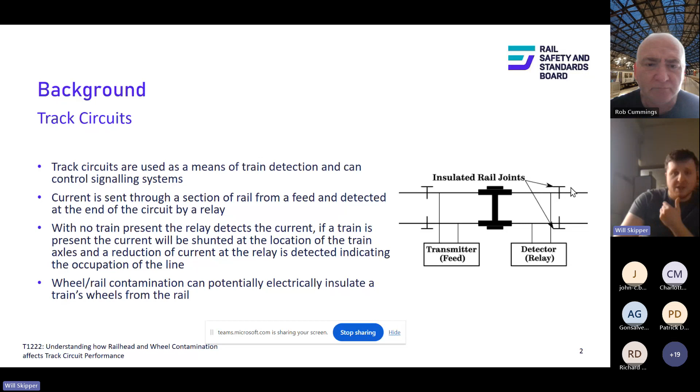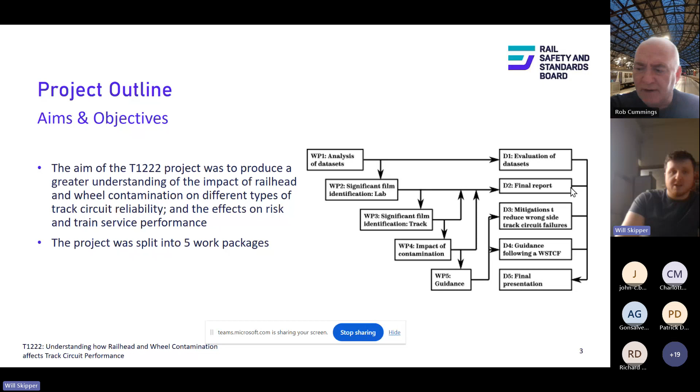A very brief look at what we actually did: first, we analysed some data sets, the national wrong side track circuit failure data for 10 years, from 2011 to 2021, looking at all those incidents. Then we did some lab testing, then track testing as well, and we produced some documents off the back of this, which I'll briefly introduce. Again, everything is online through the RSSB from the T1222 project.

So to begin with, the analysis of data sets. As I said, it's 10 years of national data that we could get our hands on, which equated to about 6,000 incidents, and these are all showing clear when occupied - essentially you've lost train detection in these cases.

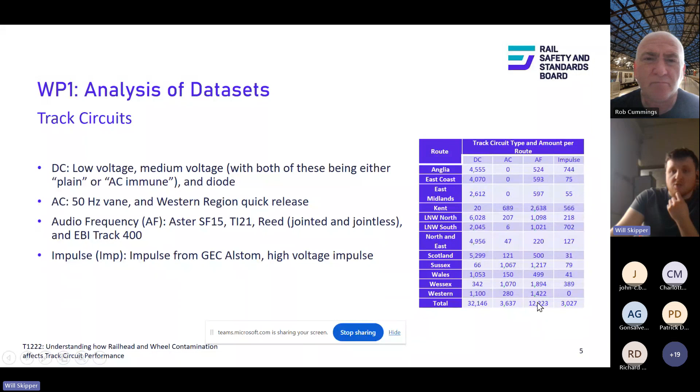We also had an initial look at what type of track circuits were about the network itself - a brief overview of different routes and whether they've got a DC track circuit (direct current), AC (alternating current), AF (audio frequency, essentially how the frequency changes over the length of a rail and whether it changes with a train going over it), or impulse, which are high voltage impulses. We get a lot of DC track circuits still knocking about, the vast majority, and then a sizable number of each of these spread across the network, varying depending on the region.

Let's look at how these contaminants were shared out. As I said, about 6,700 instances are what we looked at. About 20% of these were 'other', some sort of technical failure elsewhere not attributed to railhead contamination. But you can see about 60% of all of this was leaf contamination only.

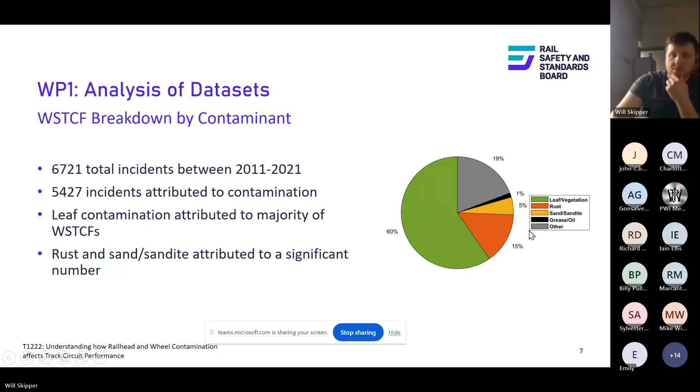We also looked at the breakdown of these incidents by route. You can see it predominantly fits the national data pattern - for example, Anglia has predominantly leaf incidents with some rust and sand also attributed. But there were a few outliers such as Wales and Western region, where you've got actually more rust incidents and fewer leaf incidents.

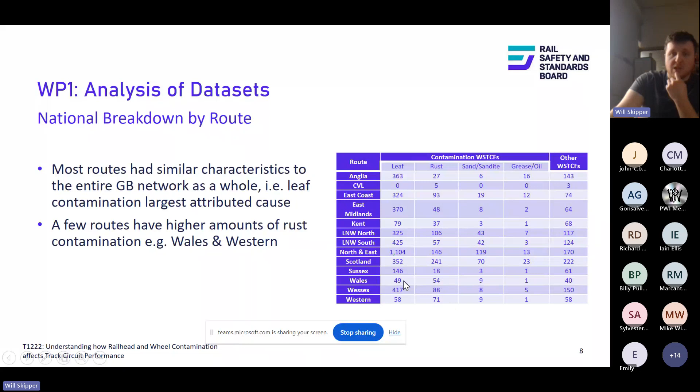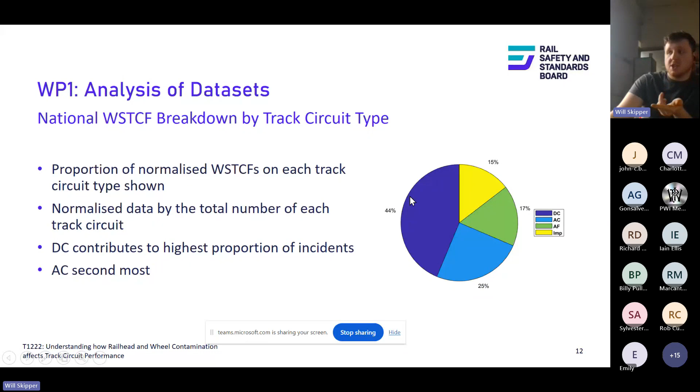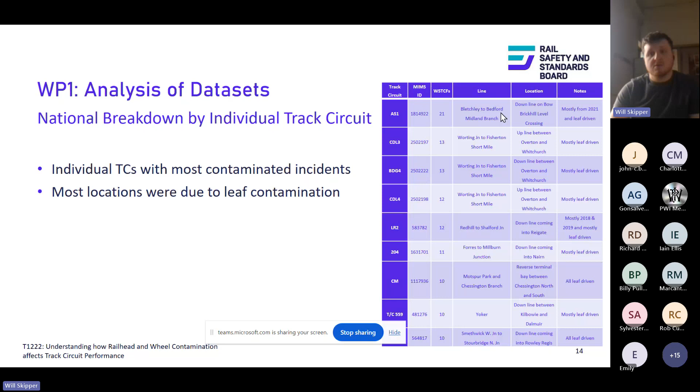We then also looked at individual track circuits to see which ones were producing the most. You can see the track circuit with the most wrong-siders was this one, Bletchley to Bedford with 21. These high locations were mostly due to leaf contamination we saw, rather than a particular area with a lot of sand or rust contamination creating these wrong-siders.

We then decided to look at the track circuits in more detail by trying to ascertain whether there was some relationship with length. Ultimately we didn't have detailed enough track circuit data to normalize this, but we did see that about 10% of all the wrong-siders occurred on track circuits shorter than 20 yards - these level crossings, junctions, etc. There does seem to be some sort of trend between length and number of wrong-siders, but without normalizing the data this is just an observation at the moment.

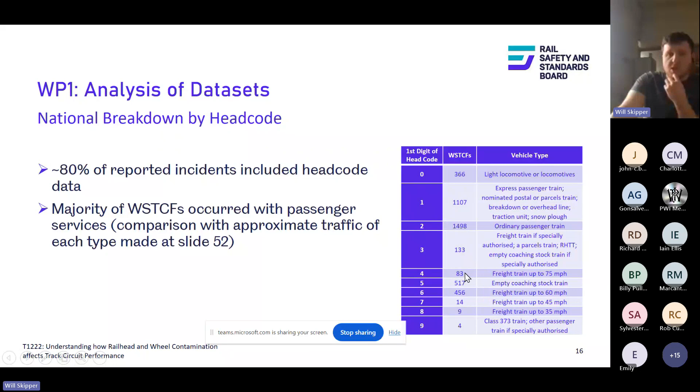So after doing that national data analysis, we ascertained that things like leaves, rust and sand were contributors to wrong-siders, so we wanted to look at these more closely in the lab. We've got a high pressure torsion system at the university, which we've used before for testing friction in the wheel-rail contact, where we can apply little third body layers and apply normal pressure similar to that of an actual wheel-rail contact - about 900 megapascals, something like that - and then twist it through. We set up a circuit around this to see what these contaminants were doing within the contact, looking at both DC and AC power supplies.

Because the data is more clear with the AC, that's all I'm presenting to you today. But again, further reports on DC stuff, if anyone's interested.

Then we looked at the range of contact pressures. In megapascals, it may not mean as much, but these are approximately equivalent to 8-ton, 12-ton, and 20-ton axle loads, so going from very light rail to freight essentially. And then we looked at leaf, rust and sand. We also did some tests on roughened surfaces to see what difference that would make, though these were smaller in number.

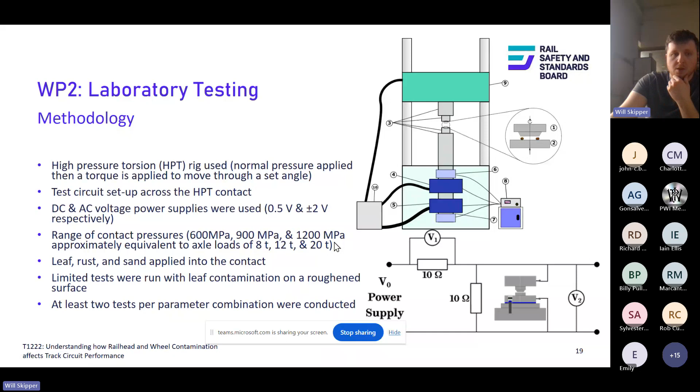So to show you what these actually look like, this was our leaf layer after conditioning it. We got more leaves in actuality when we did these tests. These were mostly from tests looking at friction, whereas for the tests involving isolation we wanted a lot more leaf layer. But you can see we can create an actual black leaf layer within this rig.

We also then looked at sand, placing it like this, so what should roughly be representative of a maximum amount you can get in there using current sanding stuff. And then rust, we quite literally just left them outside to create that layer there.

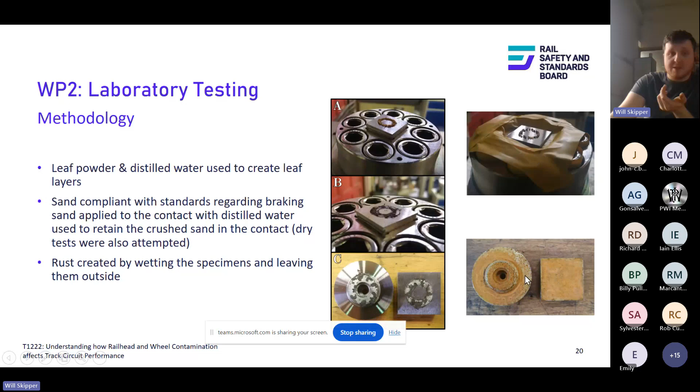So I'll very briefly go through these. Essentially this graph here shows a clean contact and the range of AC voltages you're getting across there. The AC cycles from +2 to -2, so it goes through 0 volts. So you will always get some voltage measurements at 0 volts from this histogram, and then some at this point here, which goes up to about 0.1. So this is indicative of a clean contact. It's perfectly conductive, essentially.

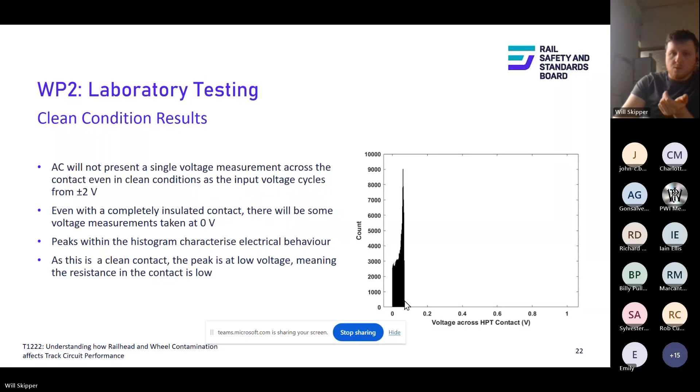Whereas when we introduce leaves into it, you can see from this here it goes up to 1 volt all of a sudden. This little peak here still cycles down to 0 volts because we're still cycling from +2 to -2. But this graph here is indicative of complete isolation between the wheel and rail specimen. So the actual thing to take away from this is that these four here show complete isolation between the wheel and rail specimens.

And these were at 600 and 900 megapascals. Whereas once we increase the contact pressure even more, we'll start to see this breakdown to something like a clean contact as the test went on. So essentially, these leaves and their ability to electrically insulate were dependent on the loads being applied, both normal, as in what we're putting directly on top of it, and tangential - how when we were sweeping through the contact, it would break down as well.

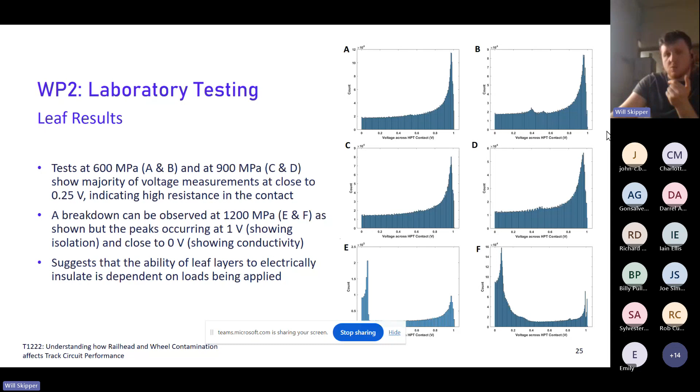And similarly for roughened surfaces, these are at 900 megapascals, where previously we saw complete isolation. Now we're seeing it breaking down to something being fairly conductive. So we did see the effect of roughening the surface did make quite a big impact on the electrical conductivity of it.

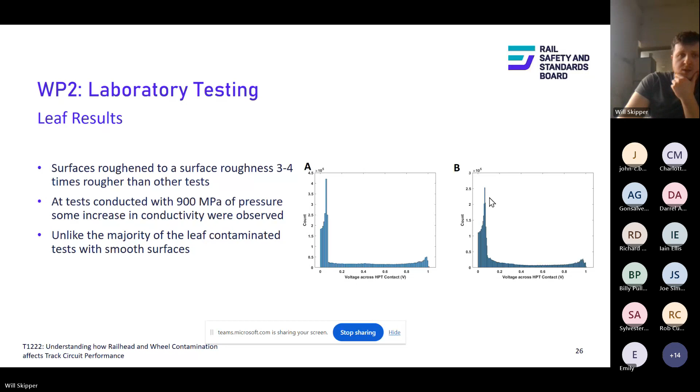We also, as I said, looked at sand. This was a bit more clear cut. You can see at 900, 1200 megapascals, so 12 and 20-ton axle loads roughly, we see almost complete conductivity in the contact. Whereas at these lower loads, we see it not being quite as clear, and we're seeing more electrical isolation up to this point.

So when we looked at these in more detail, we found that after a certain threshold pressure, the sand would tend to break down and create complete conductivity in the contact. I think this was about 750 megapascals for some sort of idea, so about 10 tons of axle load, we saw the sand break down and no longer electrically insulate.

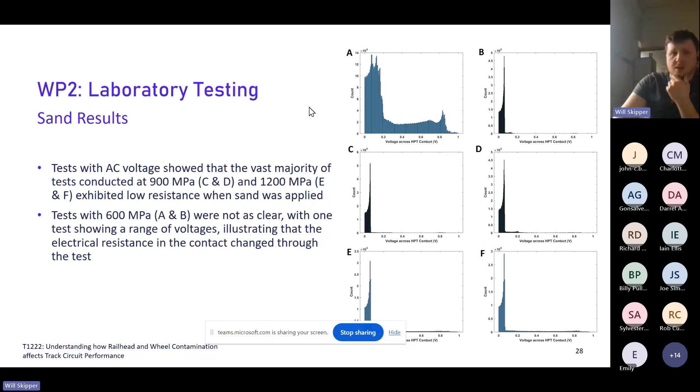Lastly, we also looked at rust. Rust essentially went away as soon as we applied any real loads. This might have just been how we made it over time - it wasn't the thickest in the world - but we did see some sort of electrical isolation from it before full loads were applied. So again, the headline is very dependent on the load you're applying, whether rust is electrically insulating or not.

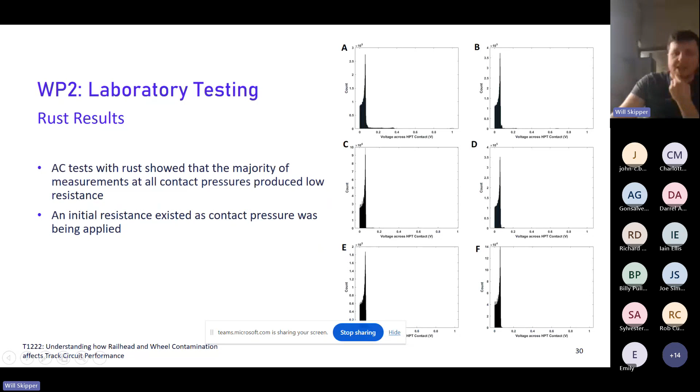So from those tests, we then went on to do track trials as well. This is a bit different as we used a low voltage DC track circuit at Wensleydale Railway. This was made from actual track circuit parts, some of which we got from Network Rail etc., and it's all representative of an actual track circuit that you would see in the wild, essentially.

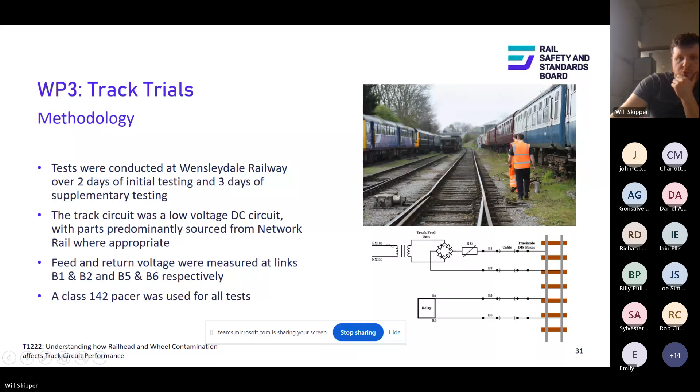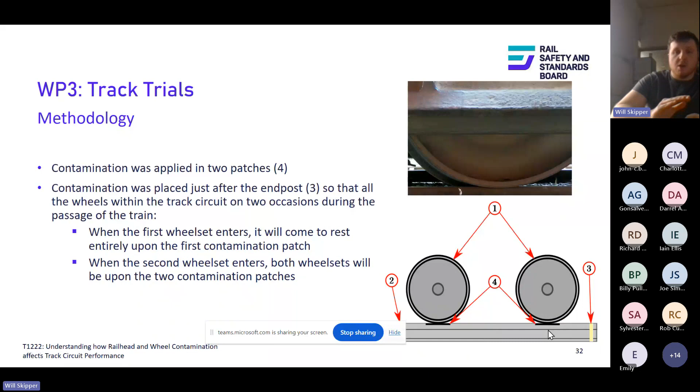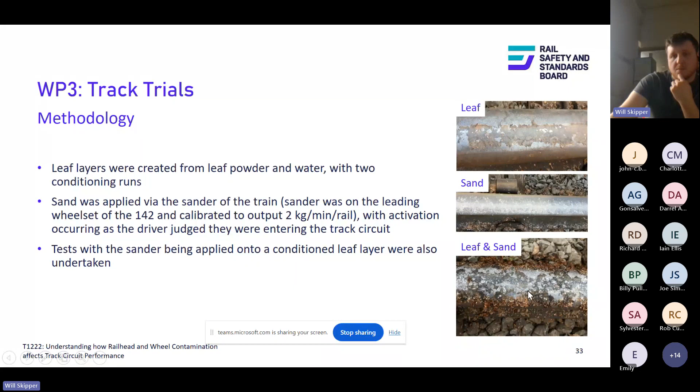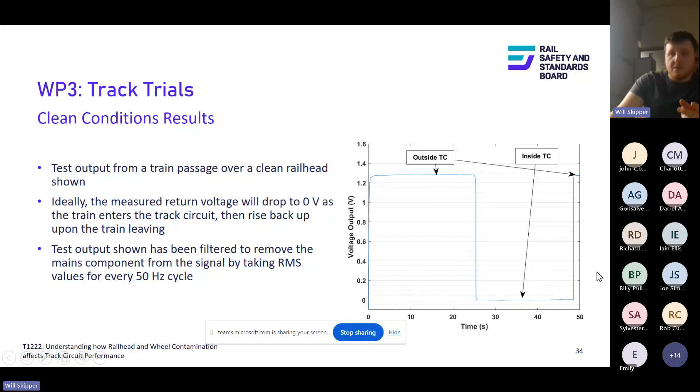But in reality we had to remove a 50 hertz cycle that was left over from the filtering done before sending out onto the rail, which I believe we'll talk about briefly here.

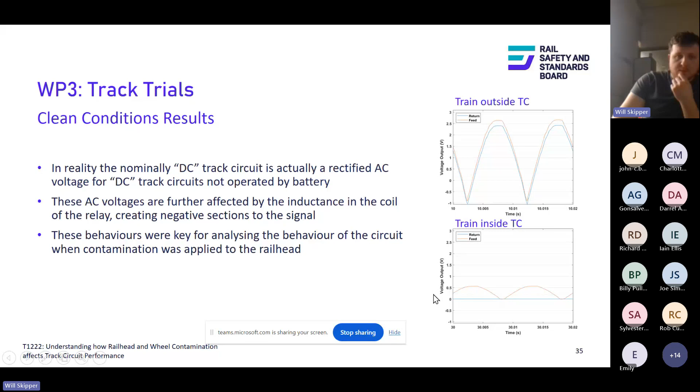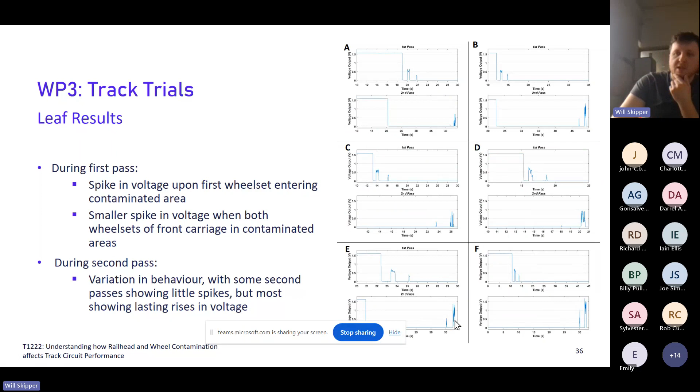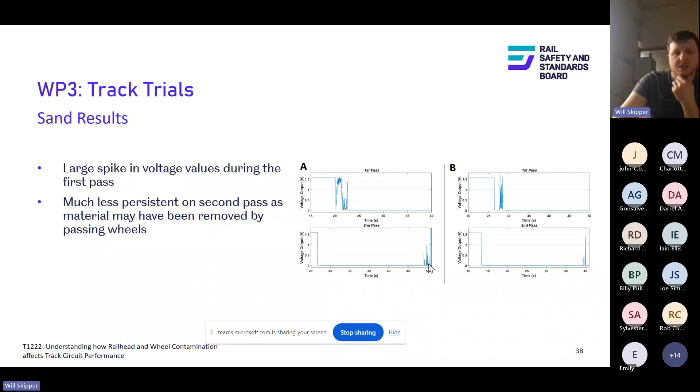This looks quite different to what we saw previously for leaves. You can see here we're creating these huge voltage spikes as it's going over the sand. What's essentially happening is that as it's rolling over a particle of sand, the sand suddenly insulates, so it interrupts the circuit. These sudden interruptions create an on-off behaviour that means the inductance in the relay coil creates large voltages, increases in the voltage, higher than even what we're feeding into here.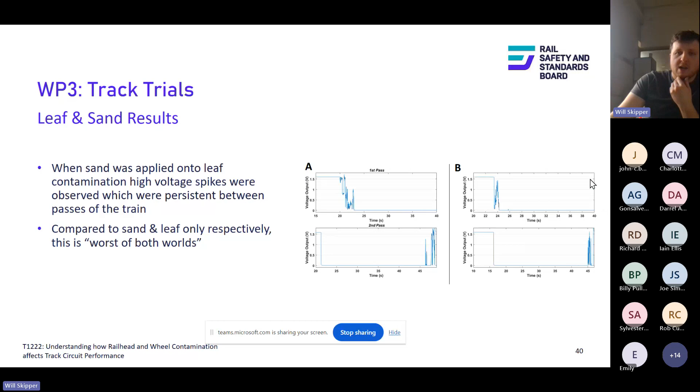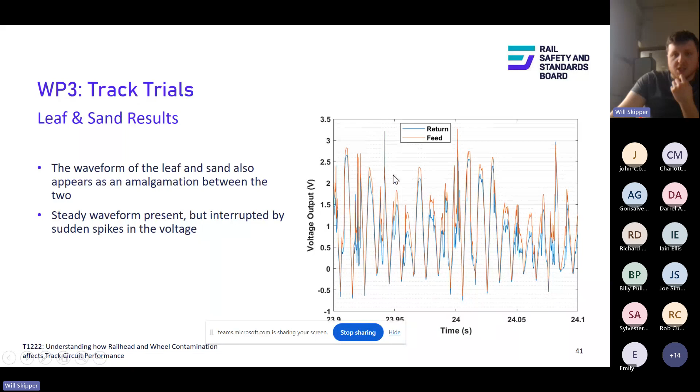And lastly, you can see the AC waveform is a mix of what we saw before. These are voltage spikes, but with more of a sinusoidal look to it.

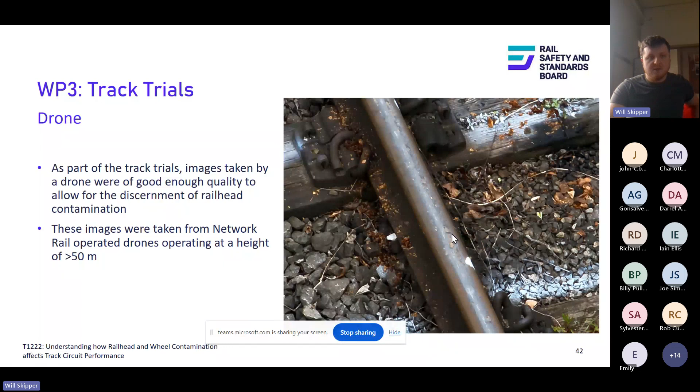So that was all our lab and field testing. We next then had a look at some case study lines. We picked 6 case study lines and looked at them in more detail, all the data analysis that we could do, and taking the lab results we had as well to feed into it.

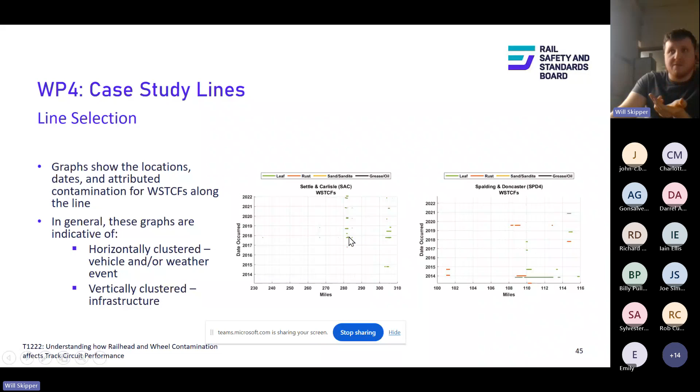Whereas something like this vertical clustering, which I'll show you with another example here - this is the Settle and Carlisle line. We're seeing these persistent vertical lines here, so they're always happening in the same location, basically every year, every autumn. So we can ascertain from that there's something at the site itself which is creating these issues. In the case of Settle and Carlisle, I think it's very leafy at these two little bits here.

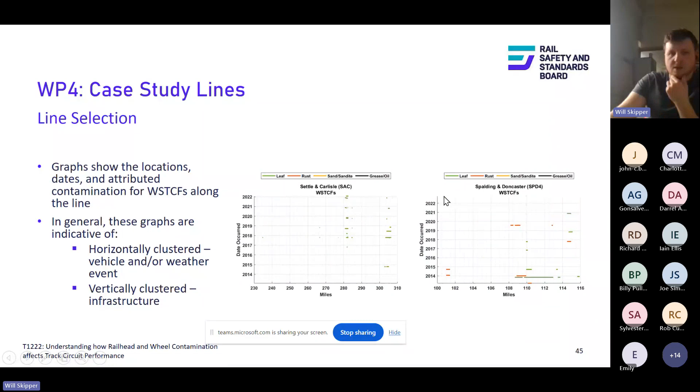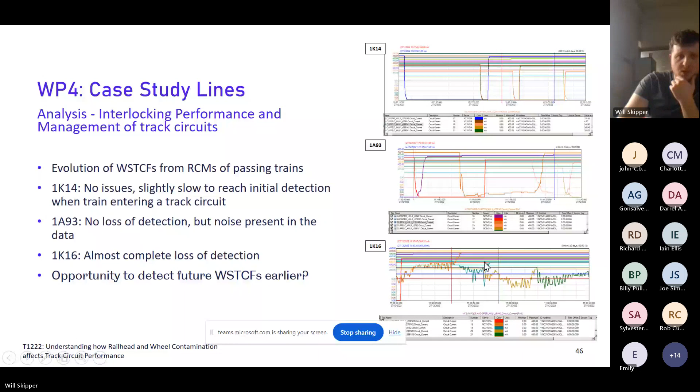So lastly, knowing what we knew about what caused the wrong sider, the contamination, the load from the labs, the type of track circuit itself from both the field testing and our analysis, we wanted to try and get an idea of how we could parameterize or measure risk of a wrong sider occurring at a section of track.

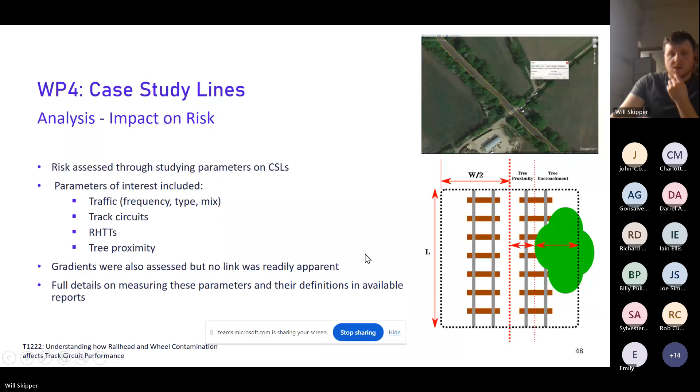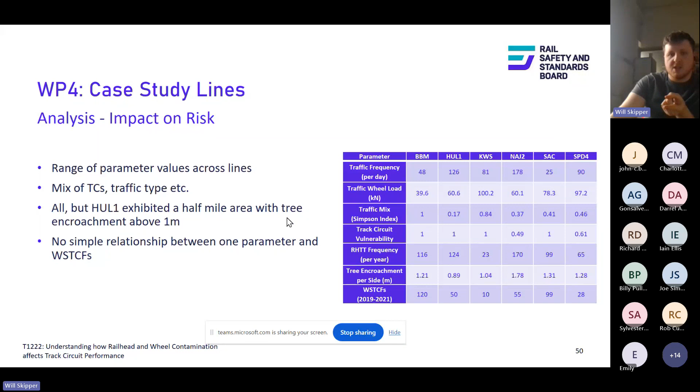You can see all of them have at least some parameter which is quite high. It's not that surprising as we chose these case study lines, as they had a lot of wrong siders initially, so it's sort of confirming why they had them.

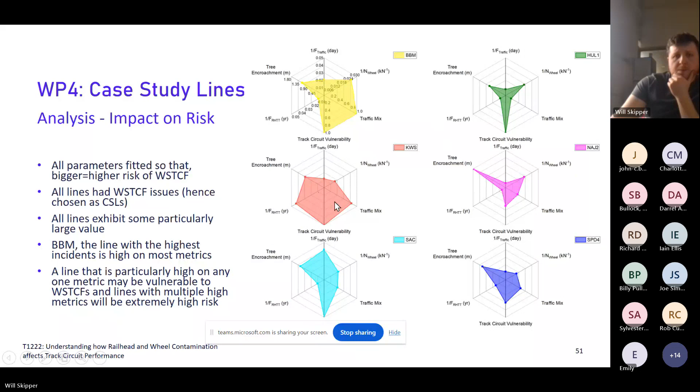Lastly, from these case study lines, we had a more detailed look at rolling stock. From before, we had the national wrong side data, and we saw from that most wrong sides were attributed to passenger trains. From the case study traffic, we were able to get an idea of how much of the traffic is normally made up by passenger trains, and could see where the discrepancy between these two were and whether there was any outliers.

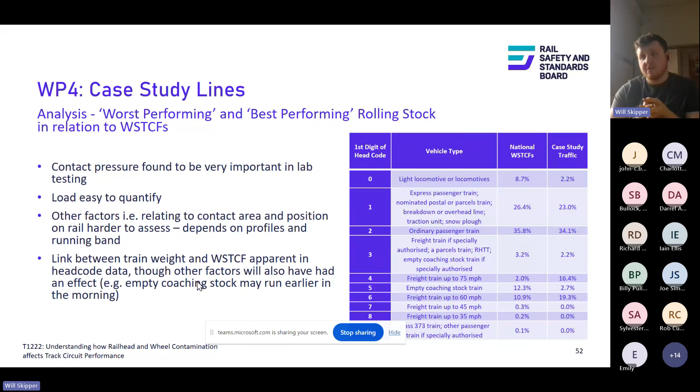So this reinforces probably some link between train weight and wrong siders. But again, there's multiple other things this could be showing. For example, the empty coaching stock may run earlier in the morning when leaf fall is going to be worse. So it's not definitive based off this alone.

So to conclude what I've actually talked about and give you the salient points: DC track circuits with leaf contamination in autumn produce the highest amount of wrong siders. I think that's the big take home, and probably something that everyone knew or at the very least suspected anyway.

The electrical characteristics of the contaminants, all the ones we looked at, were very dependent on the contact pressure that was being applied - so the axle load and what was happening upon them.

During the track trials, we characterised that leaves had a steady increase in measured voltage, but were quite hard to remove - especially after a test, we were having to really scrape away to get it off. Whereas the sand was much more erratic, but came away easily - it was practically gone by the time we did a test, we could wipe it away. Whereas when we combined sand and leaves, we got the worst of both worlds - something which produced high voltages but was very hard to remove as well.

We were also able to verify that drones were able to capture images of rail contamination in the good light that we did it in.

We also saw the inductance in a relay coil that was identified as a key component. So essentially, how your track circuit is made up matters a lot, beyond just what sort of voltage you're sending down there. And we looked at some risk factors to identify potential wrong side areas or traffic.

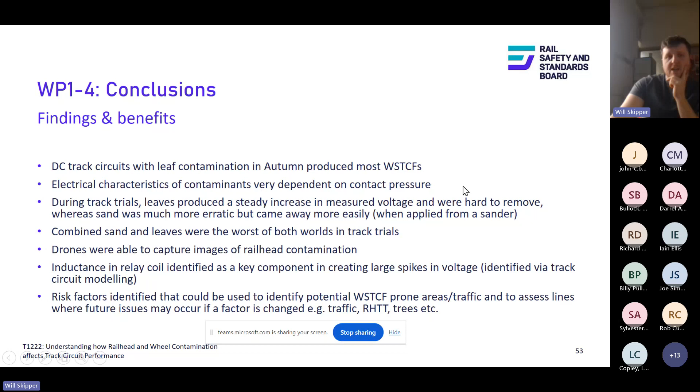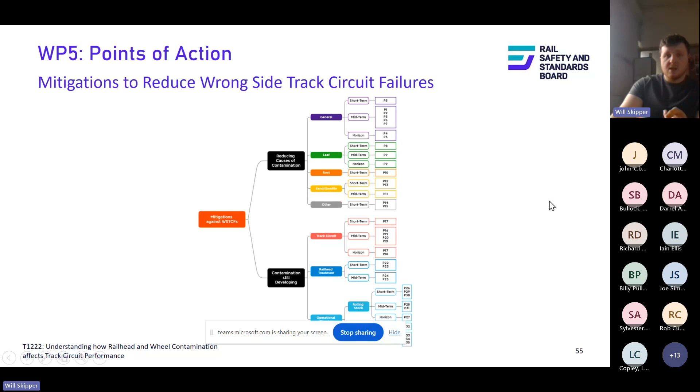So as I said before, we produced other documents, so this is just briefly a quick look. We produced a document recommending points of action for mitigating against wrong side track circuit failures, and also what to do following a wrong side track circuit failure. So all these reports and all the real detail is online on RSSB's page.

That's all I've got to talk about today. Thank you very much for listening. If you've got any questions, I'd be happy to take them now.

I'll just come back onto this. Thanks, Will, that's really interesting. Has anybody got any questions? There's nothing in the chat yet. I'll start the ball rolling.

In terms of vegetation encroachment, how did you measure that, or would you use data that Network Rail provided?

Right, that's interesting, thank you. Mike Windsor, you've got your hand up.

Yeah, thanks for your presentation, Will. Just to give you an idea of who I am, I'm currently the intelligent infrastructure project manager for the Northwest, and I've been involved with the autumn team in the area, looking at some monitoring, etc., that we've been putting on track circuits. And I was the signal maintenance engineer for Manchester for quite some time.

Yeah, it's just interesting - it would be interesting to know whether we're actually creating a compound on the top of the railhead which is an insulant. I mean, yeah, quite possibly, is my short answer, but I couldn't tell you more than that at the moment.

Thanks, Will. There is a national group, the adhesion research group. It might be worth us taking that question to them, because I think it is, Rob. Done.

We've had some really good stuff in Manchester just recently. I'd had some monitoring put on some track circuits which were causing us an issue over the autumn, and we literally had a very good telltale on it, where the rail had been ground the night before, and within 2 trains we got an alarm on the intelligent infrastructure. We sent out staff to site, and we'd seen very serious contamination on the railhead. And you're talking within 2 hours.

One thing to add on that, we've done a lot of this for adhesion, but we have found that iron is the thing which binds it together and really creates that leaf layer. So even when we were doing these track tests, we weren't getting particularly good leaf bonding until we started using a little sanding star attached to a drill head to roughen the rail at the railhead. And then we saw the leaves were much better at adhering to the railhead. So there's definitely something in that. And again, there's proof in terms of adhesion, there's quite a bit of that. But in terms of wrong-siders, there's not a lot of it, but you assume they're going to be very linked when it comes to leaves.

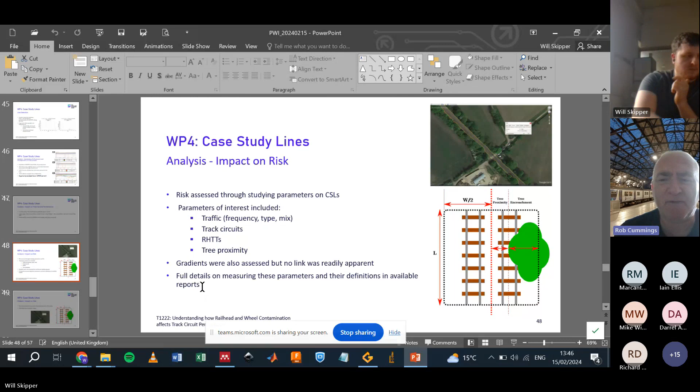Thanks, Will. The adhesion research group can sometimes guide some of the research, so we might be able to provoke someone to look at that.

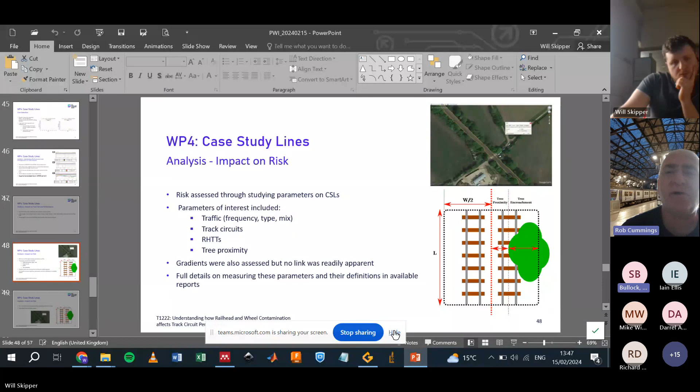Have we got any other questions? I just chucked one into the chat there. I was just wondering if the species of the leaf makes a difference.

Hold on, I'll stop sharing here. Again, there's some evidence for this from adhesion, but not really from wrong-siders. From adhesion, we've seen that basically it doesn't, especially once you've got it into the contact. So it might matter in terms of how the leaf falls or something like that, but once the leaf's in the contact, it doesn't matter what particular type of leaf it is. So for wrong-siders, there's nothing definitive.

It's Mike again, Will. Has there been anything done regarding wheel profiles? There was some documentation that I was sent regarding Class 66s, which were potentially causing more issues down to the wheel profile against the rail profile. But in terms of this, what we've looked at is contact pressure, which is a function of the contact area, so it's sort of included in that, but it's not completely. So I think for Class 66, it was partly, correct me if I'm wrong, the bogie as well, because it was moving about and going onto new contact patches.

That's correct, yeah. So what we have also looked at, one of the things I sort of glossed over during our presentation, we looked at the case study lines to look at the mix of traffic. So what we seem to suggest is if you have a lot of different types of traffic running along a line, you're less likely to see wrong-siders. Versus if you've got loads of Class 158s going along, then you have a Class 66 or something that's out of scope for what's normally on there, you're more likely to see that rise of wrong-siders. At least that's what our case study suggested.